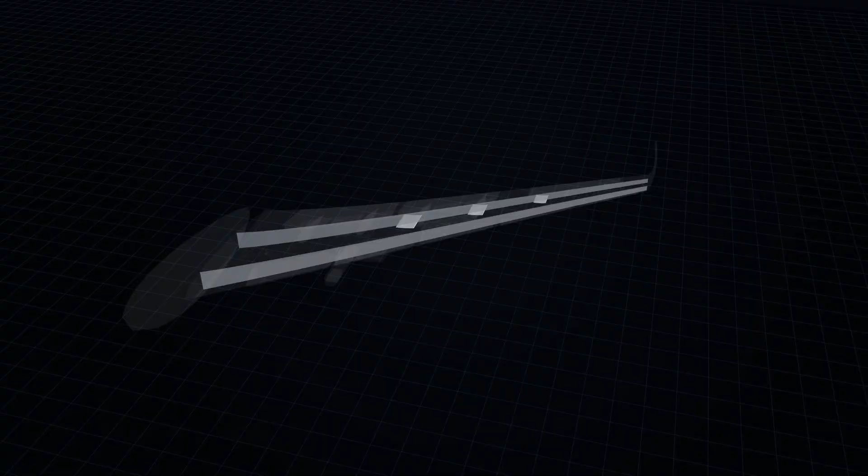Peel back the metal skin of any airplane wing, and you'll find something that looks less like an aircraft part and more like a rib cage. That's not a coincidence. Engineers call the main structure the wing box, and it's the single most important piece of the entire aircraft. Every ounce of lift the wing generates, every pound of fuel it carries, every gust of turbulence that slams into it, all of that force funnels straight into the wing box. If this structure fails, nothing else matters.

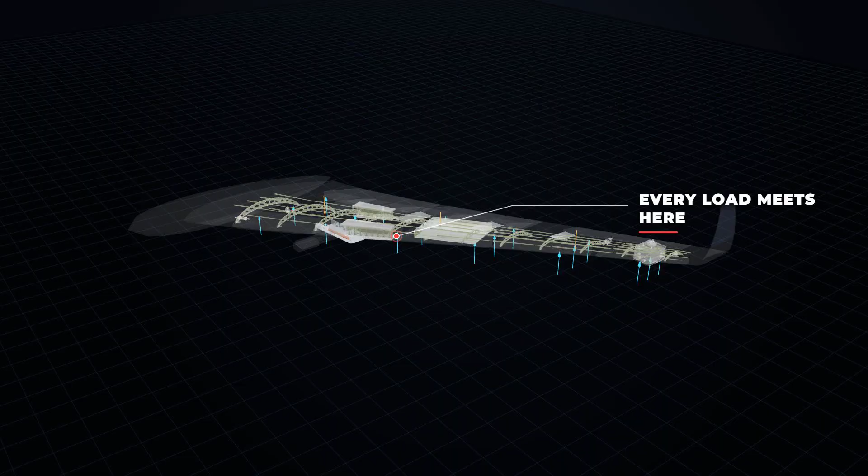So aircraft designers build it like a fortress, using 4 components working together: spars, ribs, stringers, and skin. Let's break down what each one actually does.

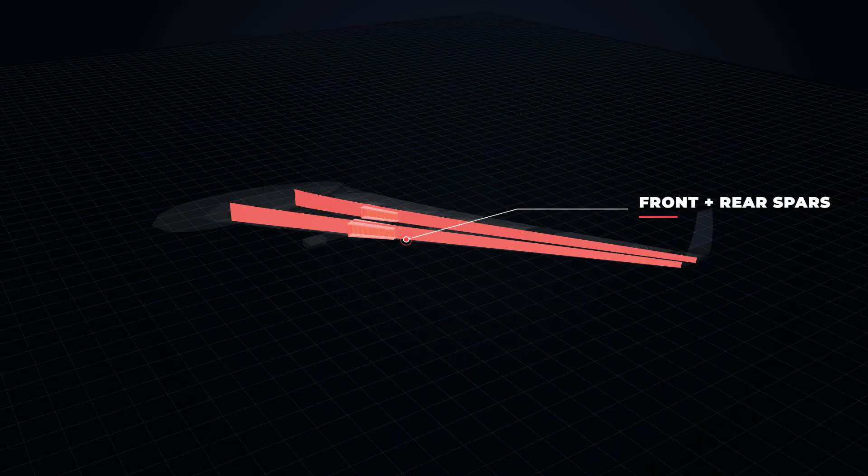Start with the spars, because these are the backbone of the whole wing. A spar is a long beam that runs from the base of the wing all the way out to the tip, and most modern airliners use 2 of them, a front spar and a rear spar. Picture the spars like the 2 long bones running down your forearm. They're the parts doing the heavy lifting.

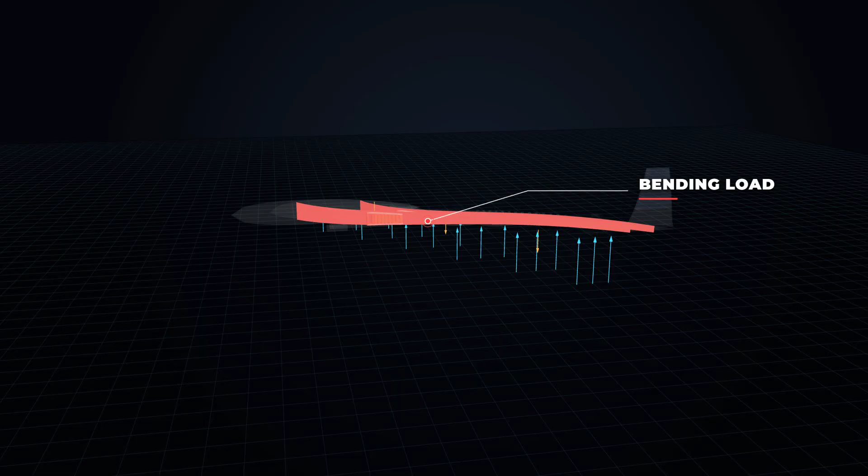In flight, air pressure builds up underneath the wing and pushes it upward, while the weight of fuel and the wing structure itself pulls it back down. That constant push and pull creates something engineers call a bending moment, and the spars are built specifically to resist it. Most spars use an I-beam shape, the same cross-section you'd find in a steel beam holding up a skyscraper, because that shape resists bending better than almost any other design while keeping weight down.

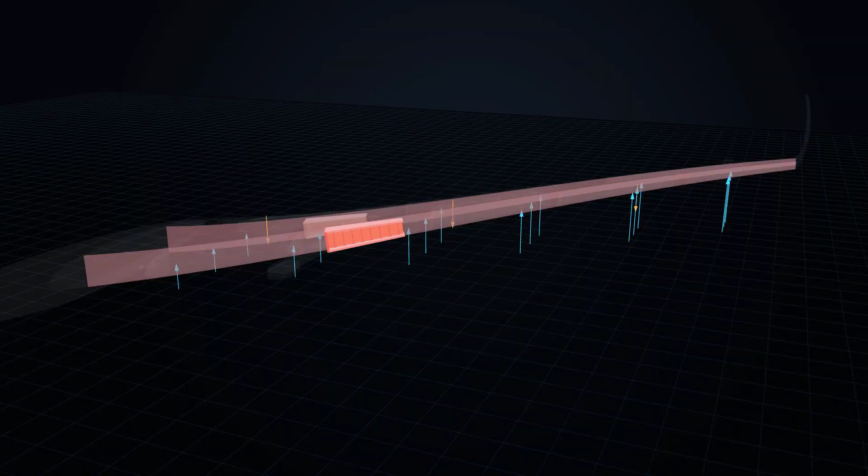And here's the part that surprises people. The closer you get to where the wing meets the fuselage, the more force the spar has to handle. That's why spars are thickest at the root and taper as they stretch toward the tip. The root of the wing is fighting the combined weight and force of everything beyond it.

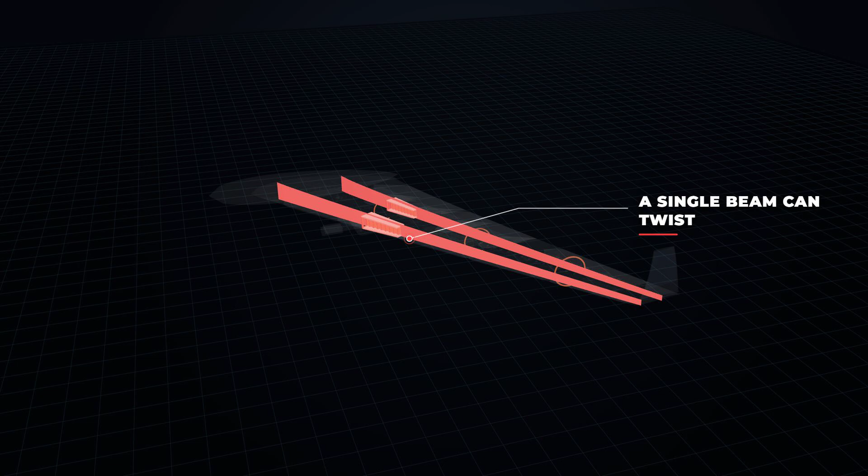But a spar alone can't do the whole job. Twist a long beam by itself and it'll twist, which is exactly what happens to a wing when uneven air pressure hits it during a turn or a gust. That's why aircraft use 2 spars instead of 1.

With a front and rear spar connected by the wing's skin, the whole structure becomes what's called a torsion box. Twisting force on one spar gets transferred to the other, and the 2 of them resist it together instead of one spar fighting it alone. This torsion box is the true core of the wing box.

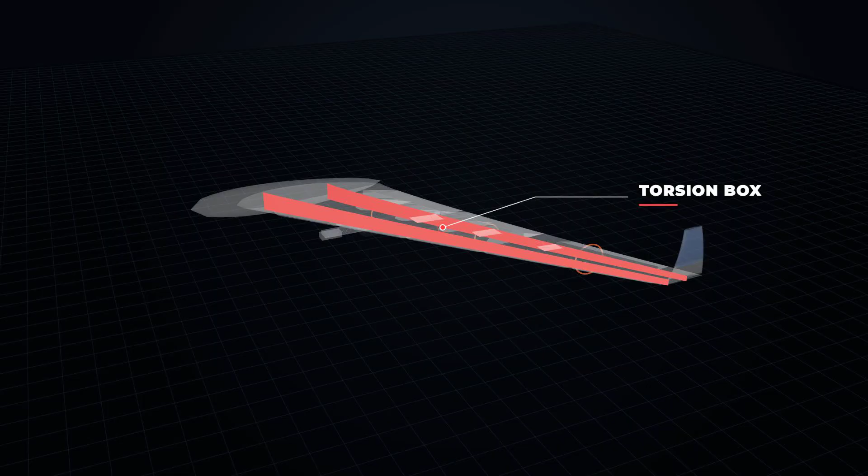And it's strong enough that in most modern jets, this sealed compartment doesn't just hold structure, it holds fuel. The space between the spars becomes an integral fuel tank, meaning the wing skin itself seals in thousands of gallons of jet fuel with no separate tank required.

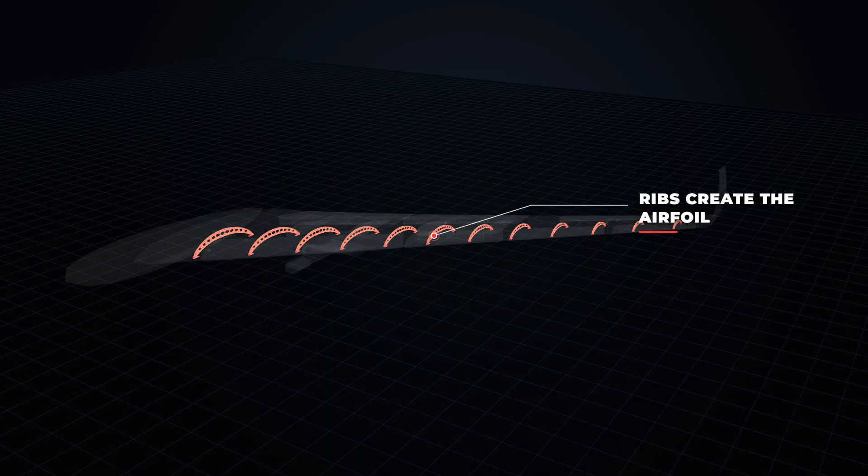Now here's where the wing gets its shape. Spars are strong, but they're just straight beams. They don't curve. And a wing needs that curved, teardrop profile called an airfoil to generate lift in the first place. That job belongs to the ribs.

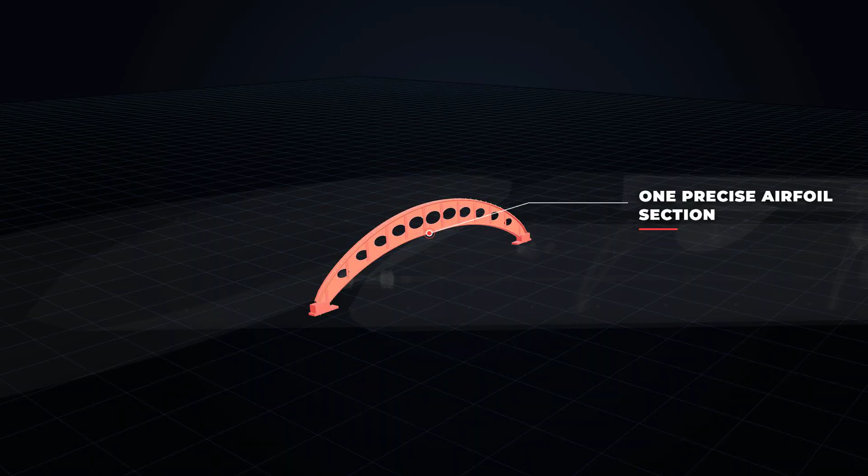Ribs run across the wing from front to back, spaced out along its length like the rungs of a ladder, and each one is cut into that precise curved shape. Bolt a row of ribs onto the spars, and suddenly you have the outline of a wing.

Ribs do more than shape the wing, though. They take the load pressing on the outer skin and stringers and funnel it inward to the spars, and they also stop the thin skin from buckling or crushing under pressure. Think of ribs like the hoops inside a barrel.

Without them, the wooden slats would collapse inward the second you filled it with liquid. Ribs do the same thing for a wing skin, keeping it rigid under constant aerodynamic pressure. So spars handle bending and twisting, while ribs hold the shape and support the skin sideways.

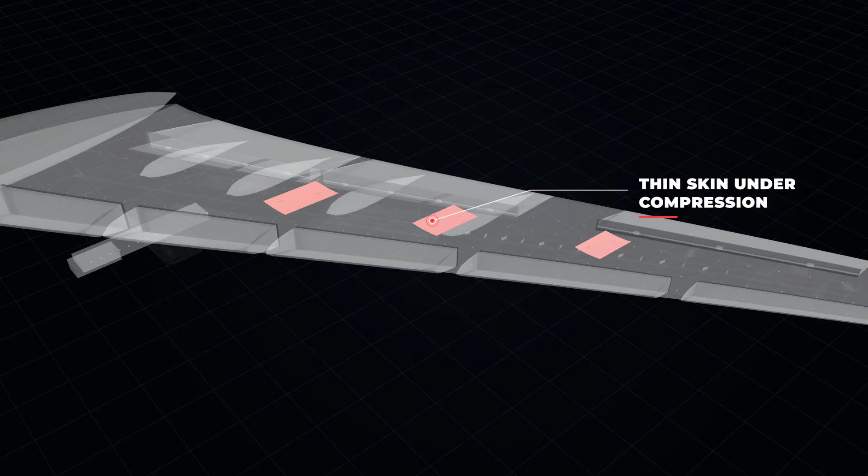What's left? The skin itself needs help too, because a thin sheet of aluminum or composite stretched between ribs would ripple and buckle under load, especially under compression when the wing bends. That's where stringers come in.

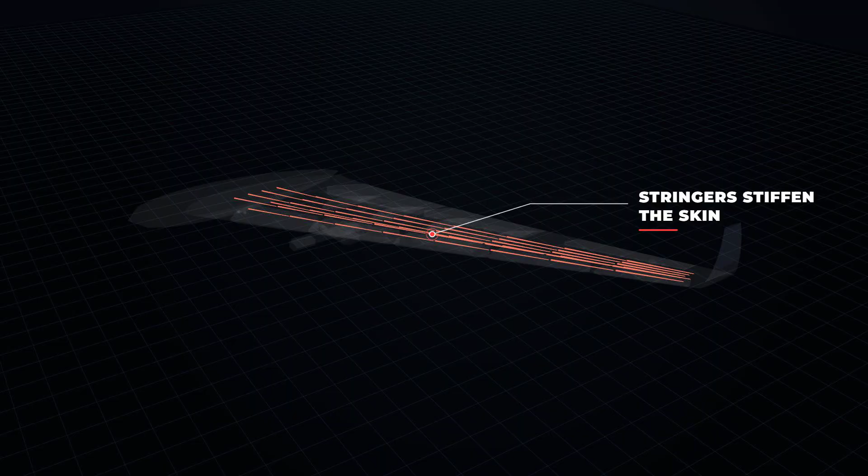Stringers are long, thin strips that run the length of the wing, riveted or bonded directly underneath the skin, running parallel to the spars. Their job is simple but critical: stiffen the skin so it can't wrinkle or buckle when the wing flexes.

Picture corrugated cardboard. A flat sheet bends easily, but add those internal ridges, and it suddenly resists bending in that direction. Stringers do the same thing for wing skin, running underneath it like structural ribs inside cardboard, turning a flimsy sheet into a load-bearing surface.

On a large commercial jet, you'll find dozens of stringers packed across a single wing, each one carrying a share of the compression and tension loads as the wing flexes through every flight.

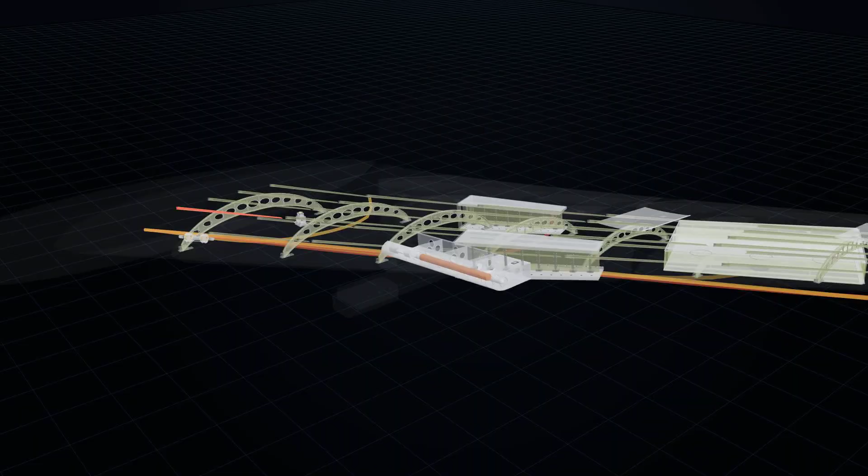So picture the whole system working together. Air pressure pushes up on the wing. The skin and stringers pick up that pressure first and pass it to the ribs. The ribs funnel it inward to the spars, and the spars carry it all the way back to the fuselage, where it transfers into the body of the aircraft.

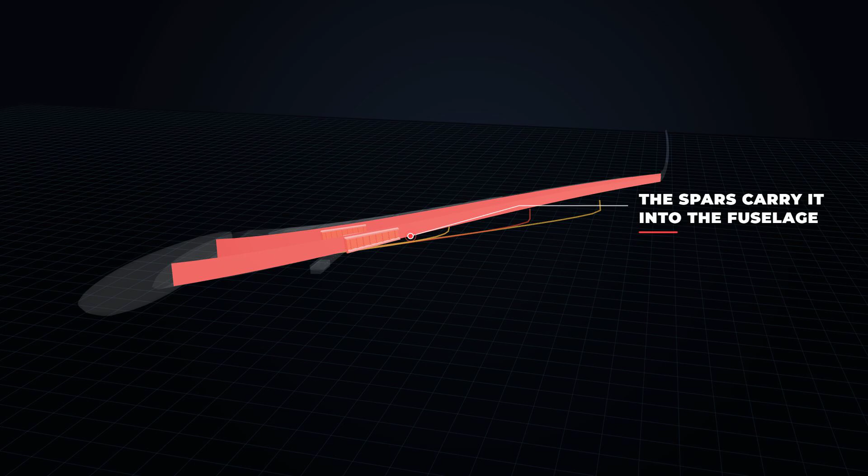Every piece has one job, and together they turn a thin curved shell into a structure that can flex feet upward in turbulence and snap right back into place, flight after flight, for decades.

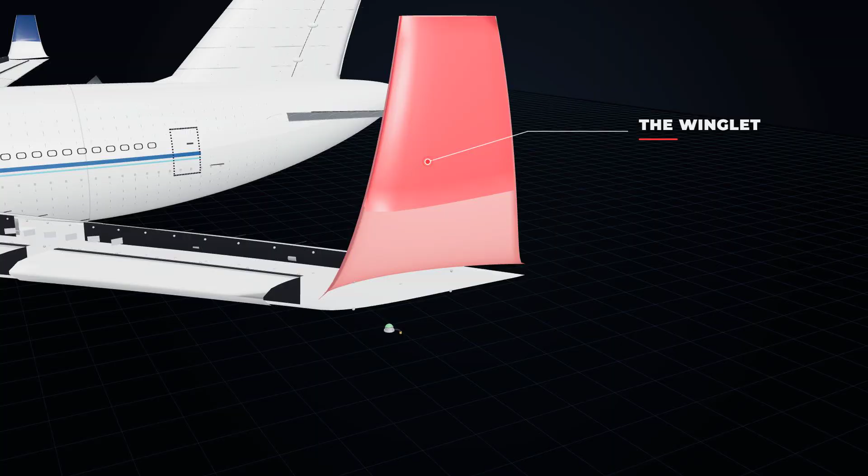Now look out at the very tip of the wing, and you'll usually spot something curving upward, sometimes sharply angled, sometimes blending smoothly into the wing itself. That's a winglet, and unlike the spars and ribs buried inside the structure, this piece is solving a completely different problem. Not strength, but drag.

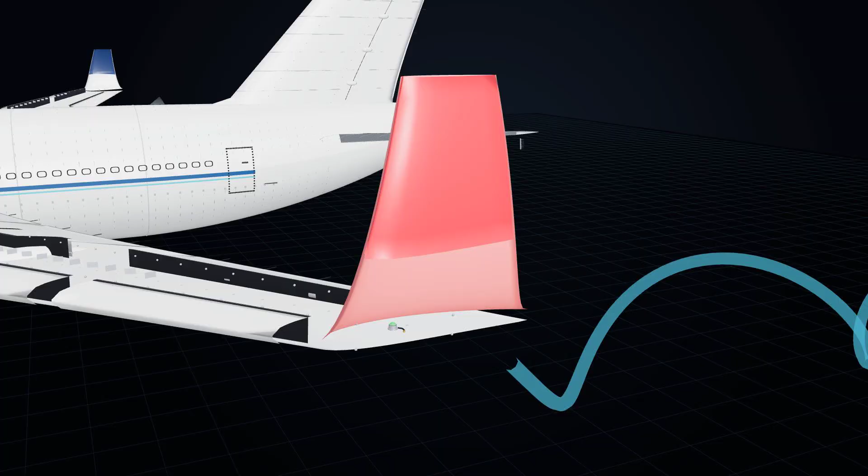Here's what's happening at the wingtip during flight. High-pressure air sitting underneath the wing is constantly trying to escape toward the low-pressure air on top. At the tip, it finally gets its chance, curling around the edge and spinning into a violent, rotating column of air called a wingtip vortex.

You've probably seen it, that ghostly spiral of condensation trailing off a jet's wing on a humid day. That vortex isn't just a visual effect, it's a serious performance problem. It creates what's called induced drag, and it's powerful enough that air traffic controllers have to space aircraft minutes apart during landing, so a small plane doesn't get flipped by the wake of a jumbo jet ahead of it.

The fix for that vortex turned out to be smarter wing shape, not more wing. A winglet redirects the escaping high-pressure air before it can curl fully around the tip, weakening the vortex and cutting the induced drag that comes with it.

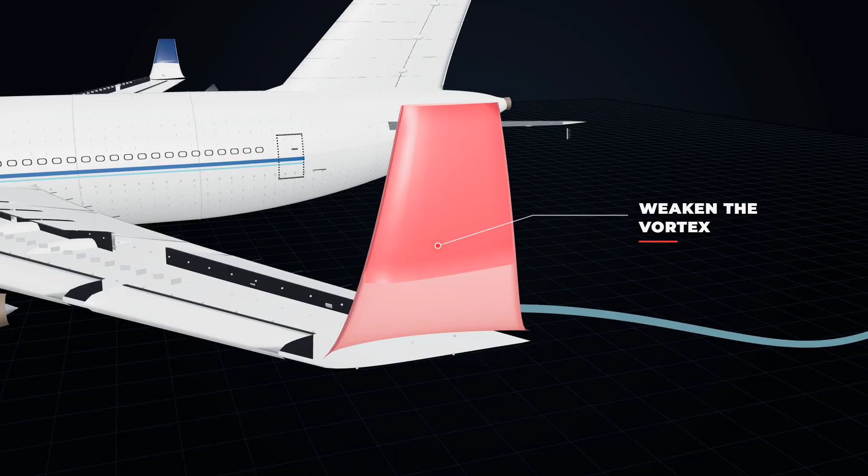In flight testing, this single upward bend at the wingtip has been shown to cut cruise drag by as much as 7%. Scale that across a fleet of aircraft flying millions of hours every year, and the payoff is staggering.

Winglets are now standard on more than 10,000 commercial jets worldwide, and they've collectively saved over 15 billion gallons of fuel. That's not a marginal tweak. That's one curved piece of metal at the wingtip, reshaping the economics of modern aviation.

So next time you're on a flight and you glance out the window and see that wingtip curving upward, or you catch the wing flexing gently as the plane climbs through turbulence, you're not looking at something fragile. You're looking at a structure engineered down to every rivet, every beam, every curve, built specifically to bend, twist, and flex without ever breaking. That flex isn't a warning sign. It's proof the design is working exactly as intended.